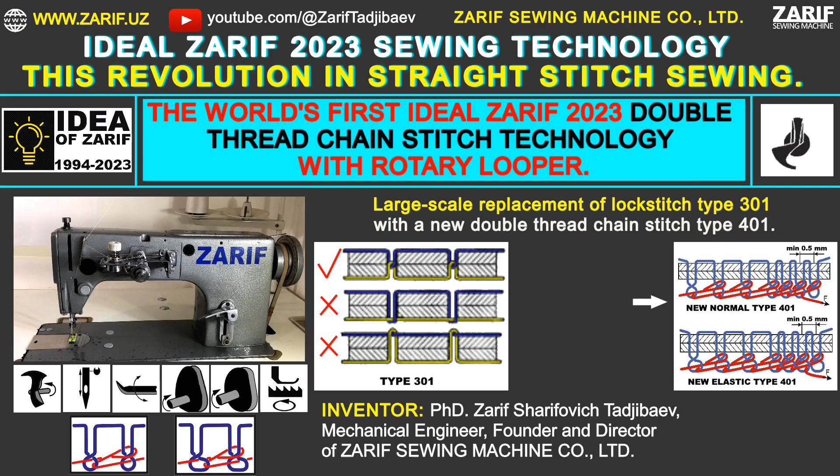Fundraising campaign to bring to market the Ideal Zarif 2023 year sewing technology, a revolution in straight stitch sewing. In 1994, we revolutionized sewing technology with the creation of the Zarif double thread chain stitch technology using a rotary looper. This breakthrough was officially recognized in 2000 with US patent number 6095069.

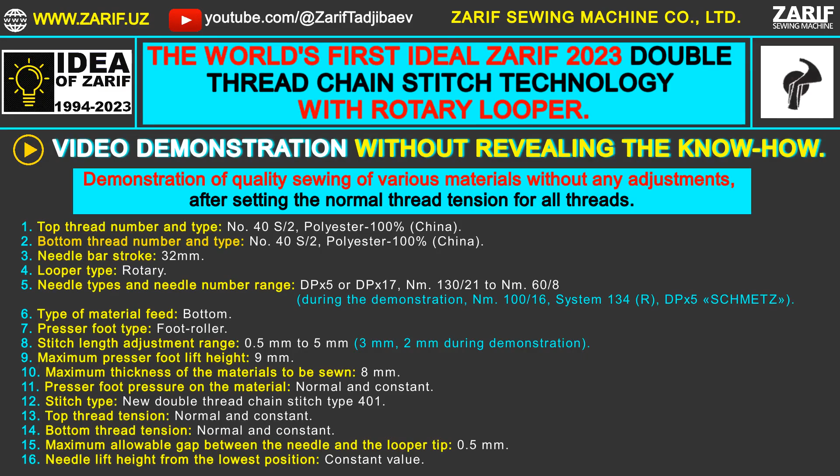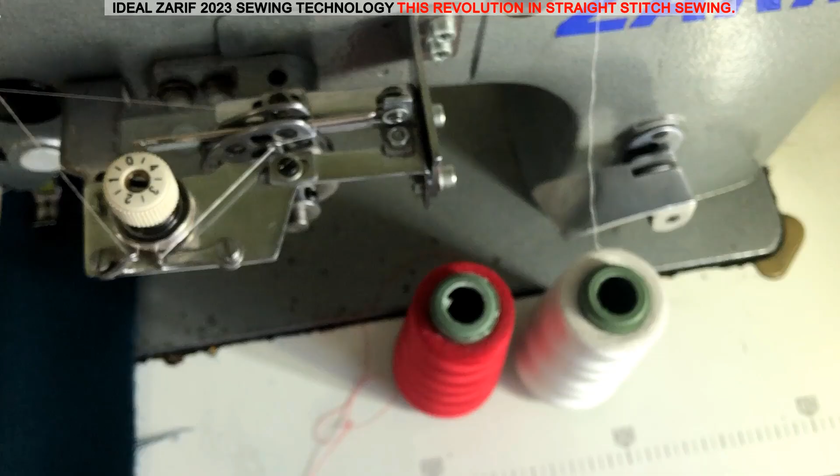Our prototype of the innovative Zarif double thread chain stitch sewing machine works on the basis of our Ideal Zarif 2023 year double thread chain stitch technology with a rotary looper. For the sewing demonstration, we will be using sewing threads made in China. The main requirement is the absence of knots, as knots disrupt the stitch formation process as they cannot pass through the eye of the needle.

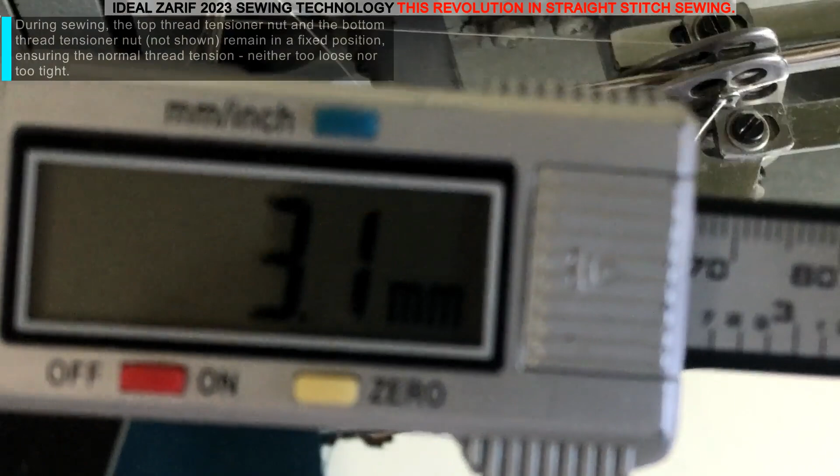During sewing, the top thread tensioner nut and the bottom thread tensioner nut, not shown, remain in a fixed position, ensuring the normal thread tension, neither too loose nor too tight.

In our Ideal Zarif 2023 double-thread chain stitch technology, the needle is not involved in pre-tightening the top thread loop from the previous stitch. As a result, for the first time ever, a double-thread chain stitch sewing machine uses a needle with one long groove.

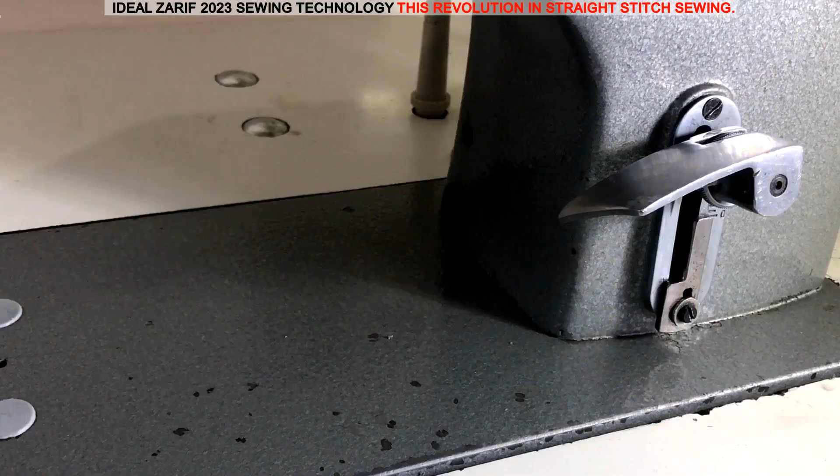This design offers greater resistance to bending compared to the double groove needle used in existing double-thread and multi-thread chain stitch technologies. Thanks to our Ideal Zarif 2023 sewing technology, it has become possible for the first time in the world to reduce the length of the double-thread chain stitch to 0.5 mm. This allows for a more secure tacking of the chain stitch seam end and prevents unraveling due to condensed stitches at a stitch length of 0.5 mm.

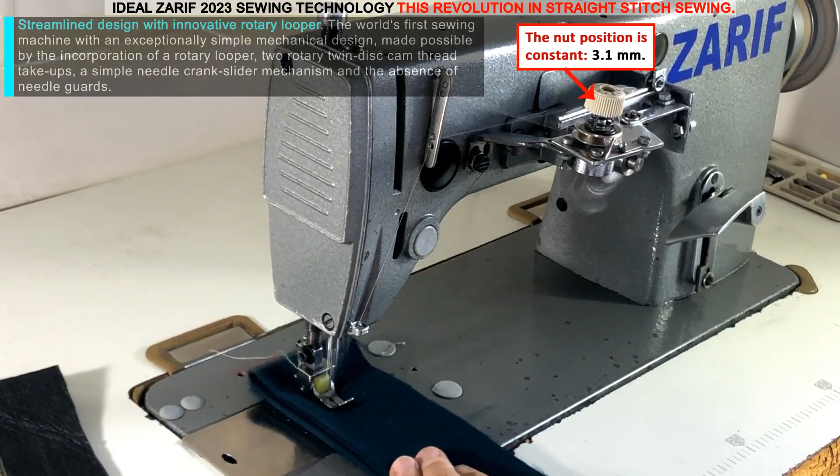Streamlined design with innovative rotary looper. The world's first sewing machine with an exceptionally simple mechanical design, made possible by the incorporation of a rotary looper, two rotary twin-disc cam thread take-ups, a simple needle crank slider mechanism, and the absence of needle guards.

Revolutionary chain stitch look. This pioneering double-thread chain stitch sewing machine produces a new double-thread chain stitch type 401, in which the loops of the top and bottom threads are rotated 180 degrees. This innovative design makes the underside of the chain stitch look like a thick thread running along the seam, rather than a chain of threads, due to the use of a rotary looper.

One long groove needle for maximum strength. For the first time, a double-thread chain stitch sewing machine uses a needle with one long groove to produce a double-thread chain stitch type 401, which offers greater flexural strength than a needle with two long grooves used in existing double-thread and multi-thread chain stitch technologies.

Easily sew combinations of different materials. The world's first double-thread chain stitch sewing machine that can sew combinations of different materials such as textile-leather, textile-plastic, and textile-plastic zippers without changing the normal tension of the threads, thanks to our know-how.

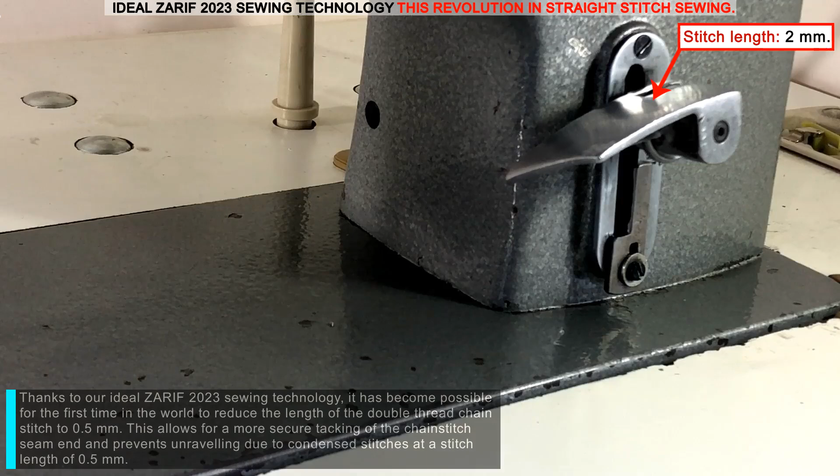The end of the chain stitch seam is securely tacked. Thanks to our Ideal Zarif 2023 sewing technology, it has become possible for the first time in the world to reduce the length of the double-thread chain stitch to 0.5 mm. This allows for a more secure tacking of the chain stitch seam end and prevents unraveling due to condensed stitches at a stitch length of 0.5 mm.

Advanced capabilities for sewing thick materials. This groundbreaking sewing machine can sew materials up to 8 mm thick with a short needle bar stroke of 32 mm, thanks to our know-how.

Breakthrough in needle stability for different materials. This revolutionary sewing machine can sew different materials without needle breakage and needle point deformation, achieved by the use of a rotary looper and a needle plate with a slot for the needle, coupled with the absence of needle guards.

Elimination of skipped stitches and unraveling. This pioneering sewing machine, thanks to our innovative design, can sew materials without a single skipped stitch, which is critical for chain stitch seams, as all types of chain stitch seams are prone to unraveling, both at the end of the seam if not securely tacked, and from the skipped stitch back to the beginning of the seam.

No thread breaks. The first sewing machine capable of sewing through materials without thread breaks when low-strength threads and threads with knots are not used, thanks to the smooth tightening of the top and bottom threads with two rotary twin-disc cam thread take-ups and our know-how.

High-quality chain stitch seams with no adjustments. For the first time in the world, we've used our know-how to achieve high-quality chain stitch seams without skipped stitches. All stitches are ideally tightened, regardless of the thickness, stiffness, or density of the material, simply by setting the normal thread tension for all threads, no further adjustments required.

A new look for the chain stitch underside. For the first time ever, the underside of a chain stitch seam looks like a thick thread running along the seam instead of a chain. This breakthrough is made possible by our new double-thread chain stitch type 401, where the top thread and bottom thread loops are rotated 180 degrees.

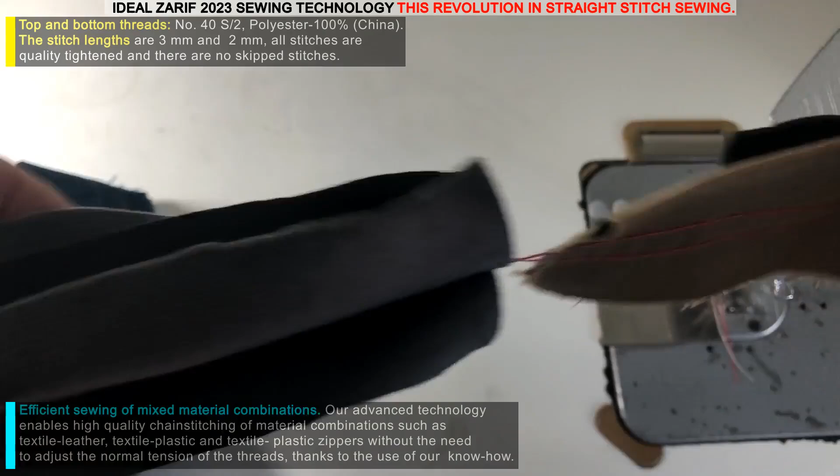For the first time, materials can be joined tightly with chain stitch. The world's first double-thread chain stitch sewing machine, thanks to the application of our know-how, is able to lock the top thread loop tightly in the stitch without changing the normal thread tension, resulting in a normal stitch that ensures a tight joining of materials for the first time in the world.

Increased wear resistance of the chain stitch seam. Thanks to our know-how, the ability to lock the top thread loop tightly in the stitch not only makes it possible for the first time to join materials tightly with a double thread chain stitch, but also presses the stitch threads tightly against the surfaces of the materials being sewn, thus increasing the wear resistance of the chain stitch seam.

Tightly joined materials made easy. Thanks to our know-how, it's now possible to join different materials tightly with chain stitch seams without having to adjust the normal thread tension. This is a revolution in sewing.

More wear-resistant chain stitches. Our advanced technology presses the top and bottom of the chain stitch against the surface of the material, greatly increasing the wear resistance of the chain stitch. This is achieved by strongly tightening the loop of the top thread in each stitch, thanks to the use of our know-how, another advance in sewing technology.

For the first time, materials can be joined tightly with chain stitch. The world's first double-thread chain stitch sewing machine, thanks to the application of our know-how, is able to lock the top thread loop tightly in the stitch without changing the normal thread tension, resulting in a normal stitch that ensures a tight joining of materials for the first time in the world.

Increased wear resistance of the chain stitch seam. Thanks to our know-how, the ability to lock the top thread loop tightly in the stitch not only makes it possible for the first time to join materials tightly with a double thread chain stitch, but also presses the stitch threads tightly against the surfaces of the materials being sewn, thus increasing the wear resistance of the chain stitch seam.

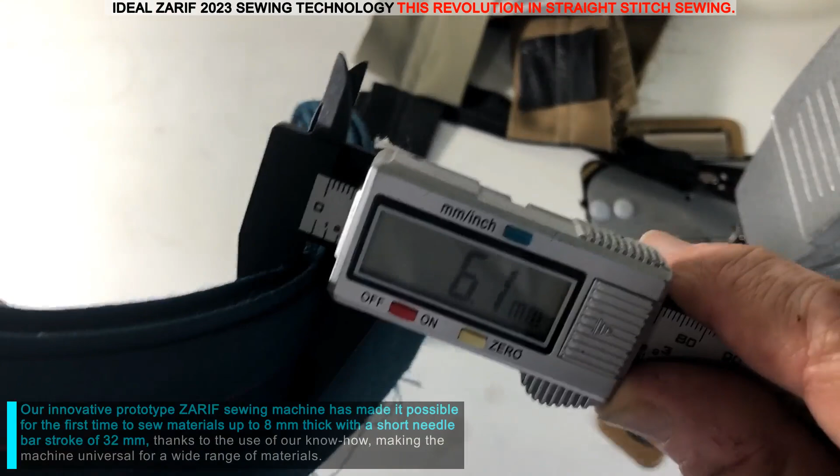Our innovative prototype Zarif sewing machine has made it possible for the first time to sew materials up to 8 mm thick with a short needle bar stroke of 32 mm, thanks to the use of our know-how, making the machine universal for a wide range of materials. The thickness of various cross-linked materials consisting of 2 or more layers in a compressed state.

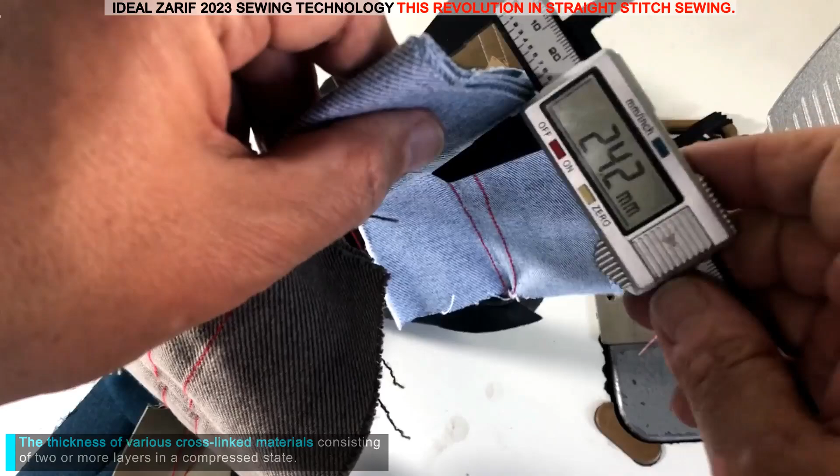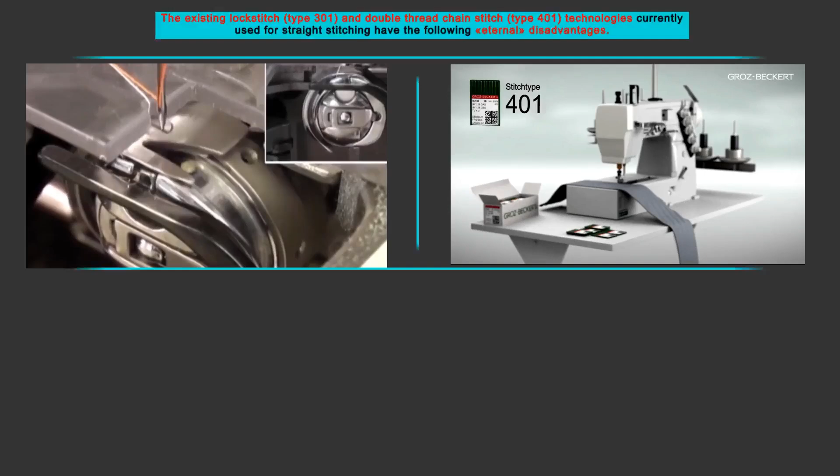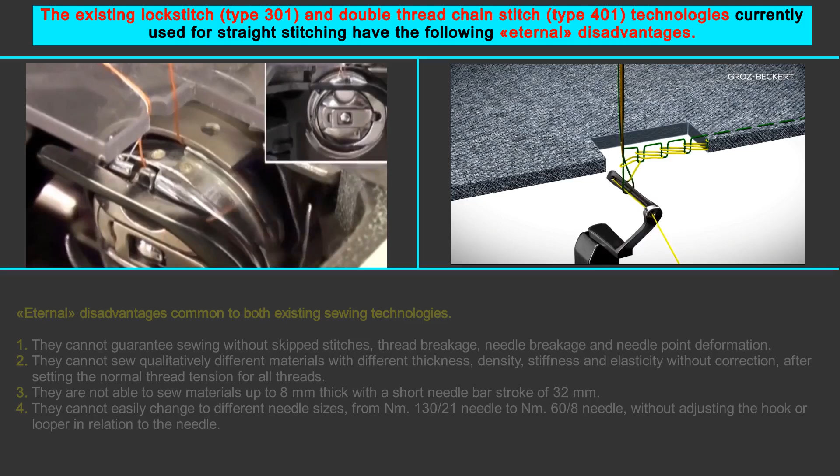The existing lockstitch (Type 301) and double-thread chain stitch (Type 401) technologies currently used for straight stitching have the following eternal disadvantages common to both existing sewing technologies.

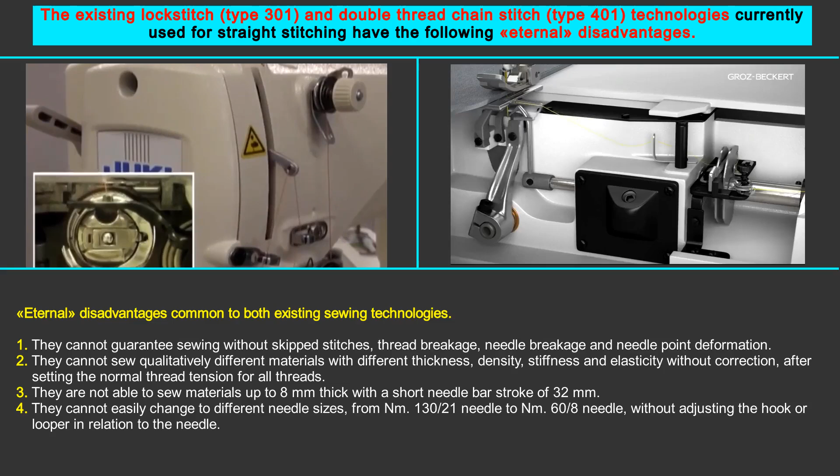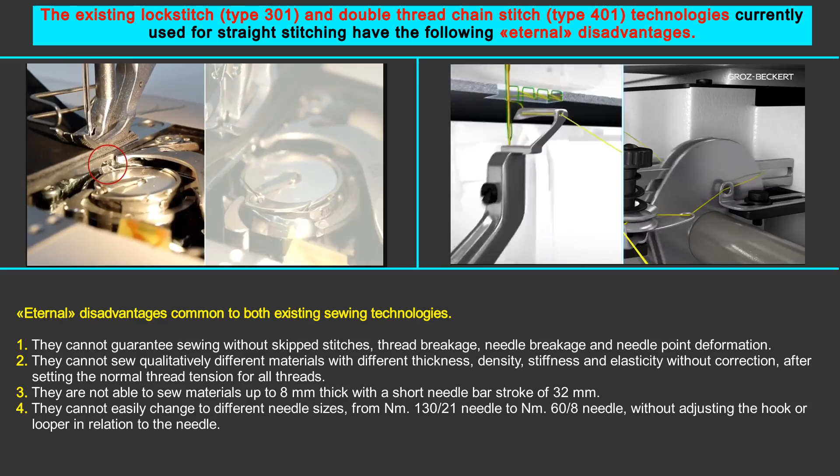They cannot guarantee sewing without skipped stitches, thread breakage, and needle point deformation. They cannot sew qualitatively different materials with different thickness, density, stiffness, and elasticity without correction, after setting the normal thread tension for all threads. They are not able to sew materials up to 8 mm thick with a short needle bar stroke of 32 mm. They cannot easily change to different needle sizes, from Nm. 130 needle to Nm. 60 needle, without adjusting the hook or looper in relation to the needle.

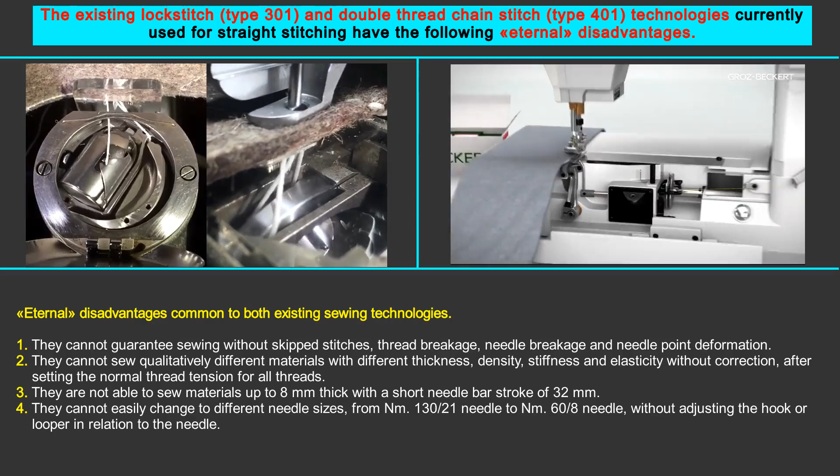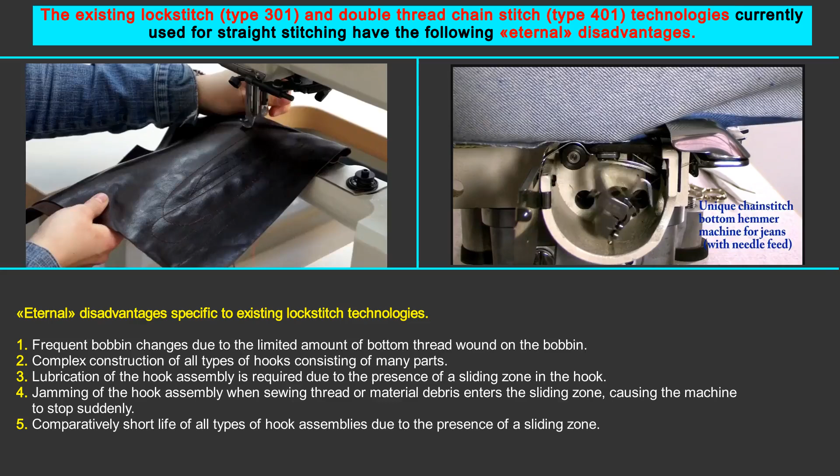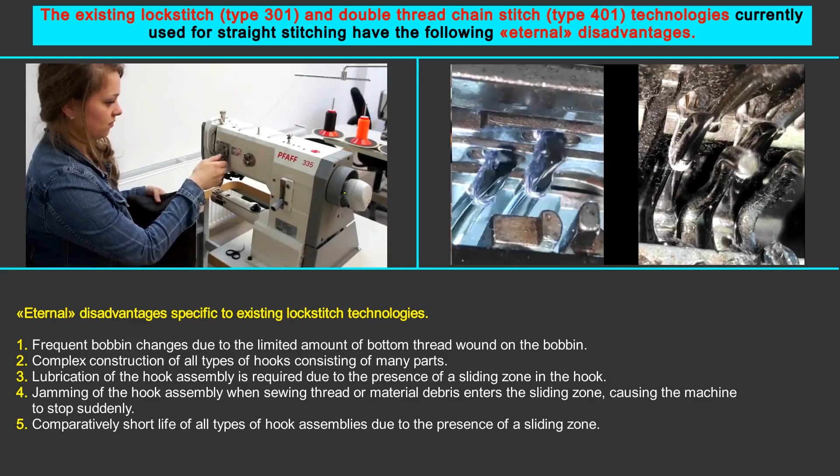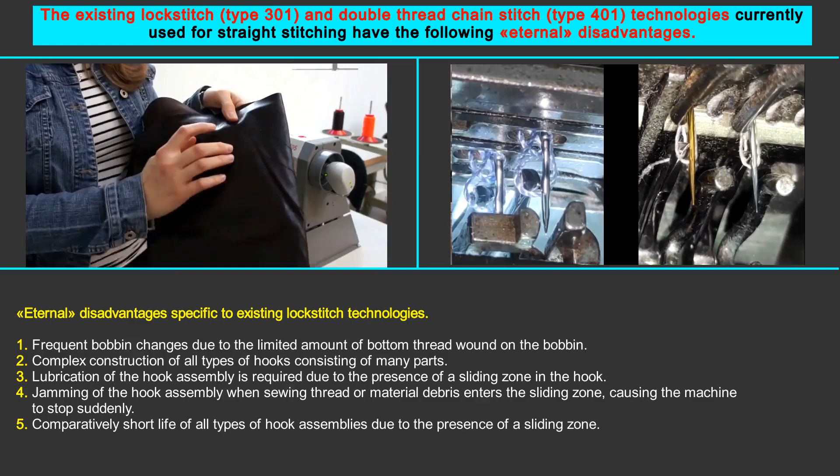Eternal disadvantages specific to existing lockstitch technologies: frequent bobbin changes due to the limited amount of bottom thread wound on the bobbin; complex construction of all types of hooks consisting of many parts; lubrication of the hook assembly is required due to the presence of a sliding zone in the hook; jamming of the hook assembly when sewing thread or material debris enters the sliding zone, causing the machine to stop suddenly; and comparatively short life of all types of hook assemblies due to the presence of a sliding zone.

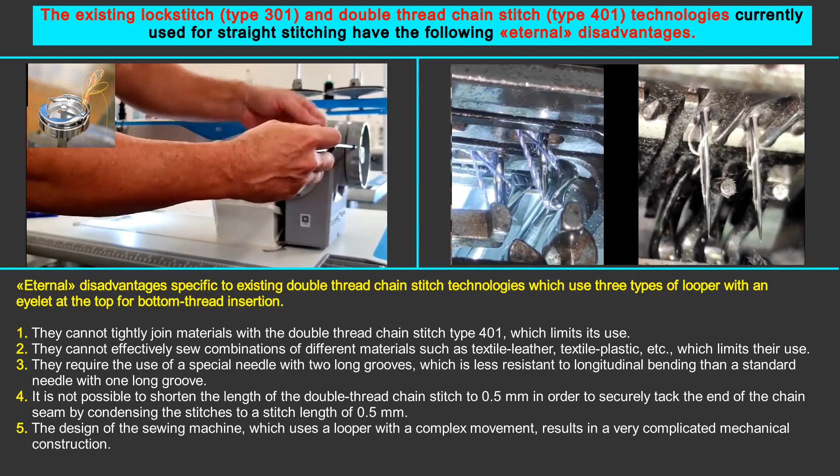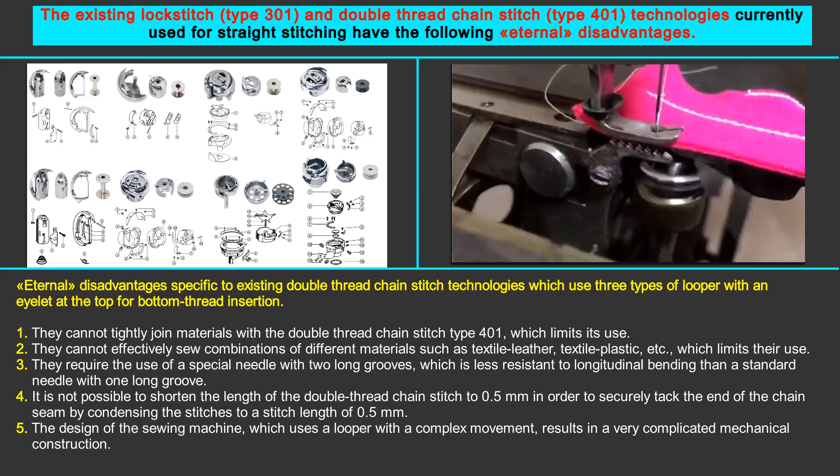Eternal disadvantages specific to existing double-thread chain stitch technologies, which use 3 types of looper with an eyelet at the top for bottom thread insertion: they cannot tightly join materials with the double-thread chain stitch type 401, which limits its use. They cannot effectively sew combinations of different materials such as textile-leather, textile-plastic, etc., which limits their use. They require the use of a special needle with 2 long grooves, which is less resistant to longitudinal bending than a standard needle with 1 long groove.

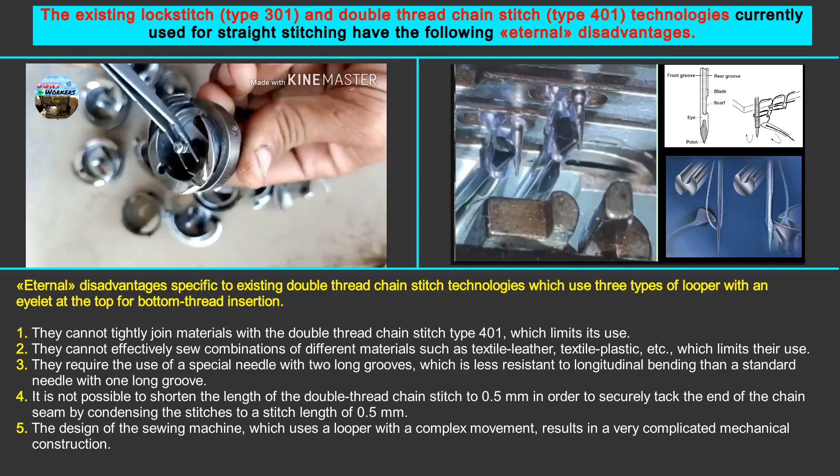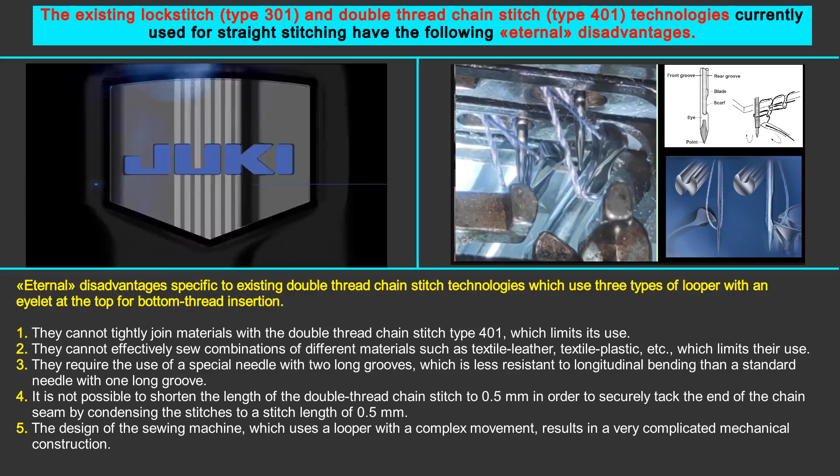It is not possible to shorten the length of the double thread chain stitch to 0.5 mm in order to securely tack the end of the chain seam by condensing the stitches to a stitch length of 0.5 mm. The design of the sewing machine, which uses a looper with a complex movement, results in a very complicated mechanical construction.

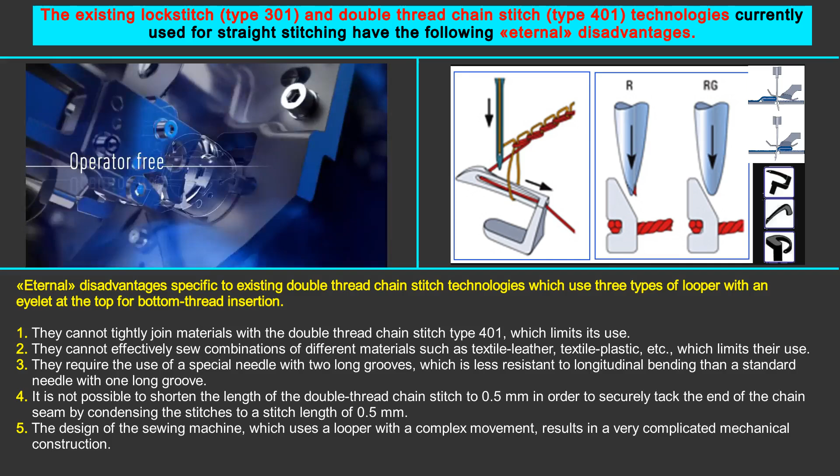Our ideal Zarif 2023 double thread chain stitch technology has revolutionized sewing machine design and straight stitch sewing. For the first time, a rotary looper is used to form a double thread chain stitch, resulting in the world's first new double thread chain stitch type 401, where the top and bottom thread loops are rotated 180 degrees.

For the first time, an ordinary needle with a single long groove is used to form a double thread chain stitch, as the needle does not participate in the pre-tightening of the top thread loop placed in the previous stitch. For the first time, materials up to 8 mm thick can be sewn with a needle bar stroke of 32 mm. For the first time, it is possible to sew materials of different thickness, density, stiffness, and elasticity without any adjustments, by setting the normal tension for all threads.

For the first time, it is possible to sew without skipped stitches, thread breakage, needle breakage, and needle point deformation, provided the thread is free of knots and the needle size matches the material being sewn. For the first time, using our know-how, it is possible to tightly pull the top thread loop in a stitch to achieve a dense material join, or to loosely pull the top thread loop in a stitch to get smooth seams on light materials and elastic seams in stretchable materials, without adjusting normal thread tension.

For the first time, the maximum allowable gap between the needle and the tip of the looper has been increased to 0.5 mm, allowing an easy transition from a number 130 needle to a number 60 needle without adjusting the looper relative to the needle. For the first time, high stitch formation reliability has been achieved without the use of needle guards.

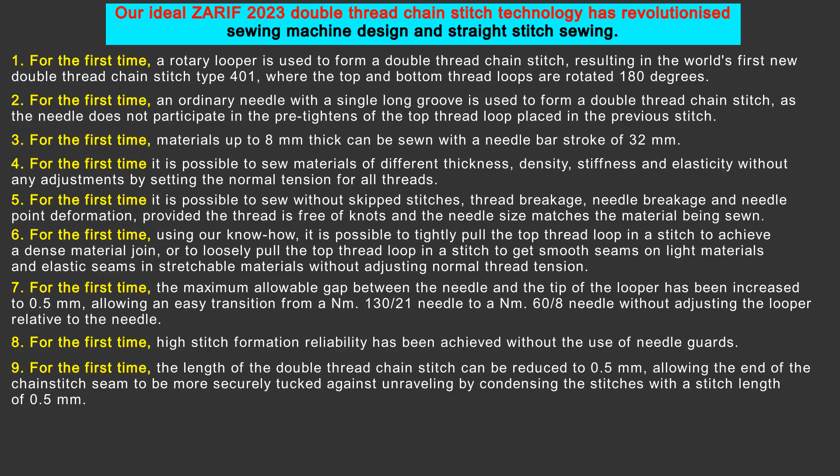For the first time, the length of the double thread chain stitch can be reduced to 0.5 mm, allowing the end of the chain stitch seam to be more securely tucked against unraveling by condensing the stitches with a stitch length of 0.5 mm. For the first time, it is possible to develop different types of sewing machines, with different types of platforms and different types of material feed, with a very simple mechanical design that operates with high reliability and long service life.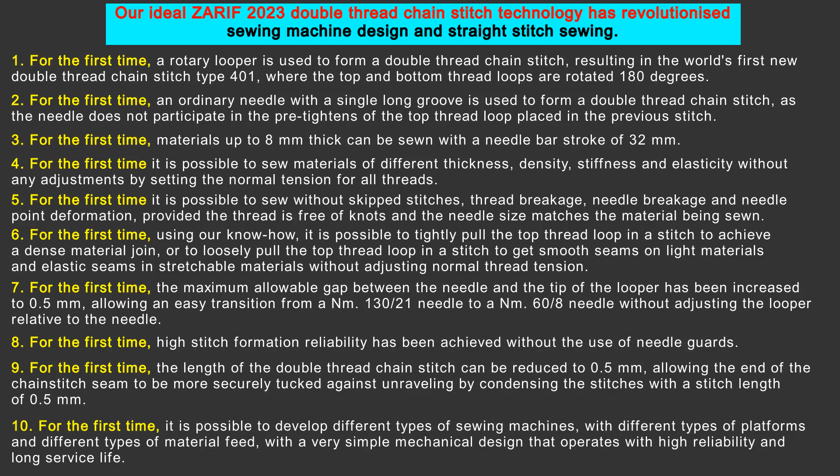History of Zarif double thread chain stitch technology with rotary looper: In 1994, we came up with the idea of creating a double thread chain stitch type 401 using a rotary looper. We applied for a patent for this new Zarif double thread chain stitch technology, and in 2000, US patent number 6095069 was granted.

Before our invention, the rotary looper was used in the single thread chain stitch technology, type 101, on single thread chain stitch sewing machines and button machines.

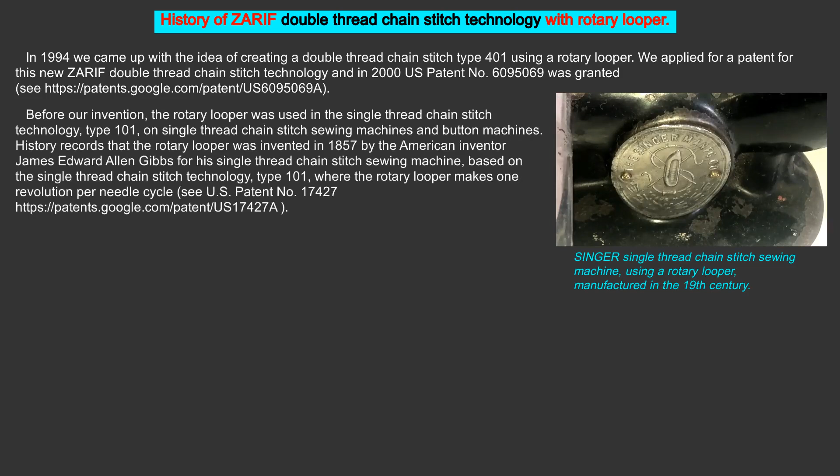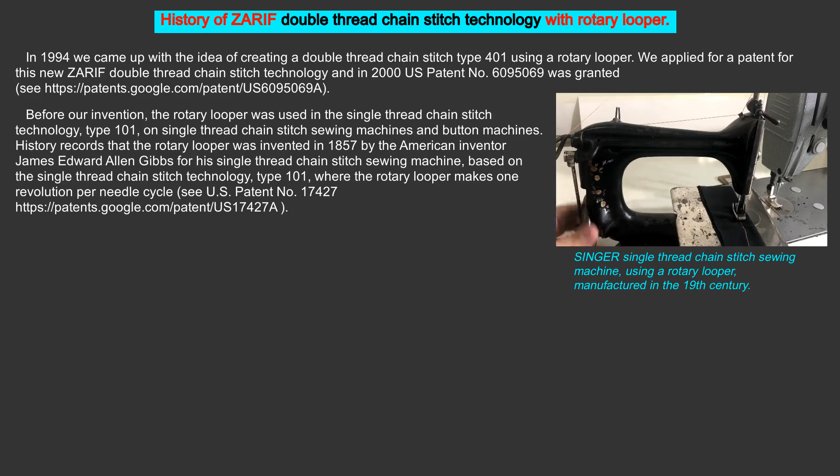History records that the rotary looper was invented in 1857 by the American inventor James Edward Allen Gibbs for his single thread chain stitch sewing machine, based on the single thread chain stitch technology, type 101, where the rotary looper makes 1 revolution per needle cycle. See US patent number 17427.

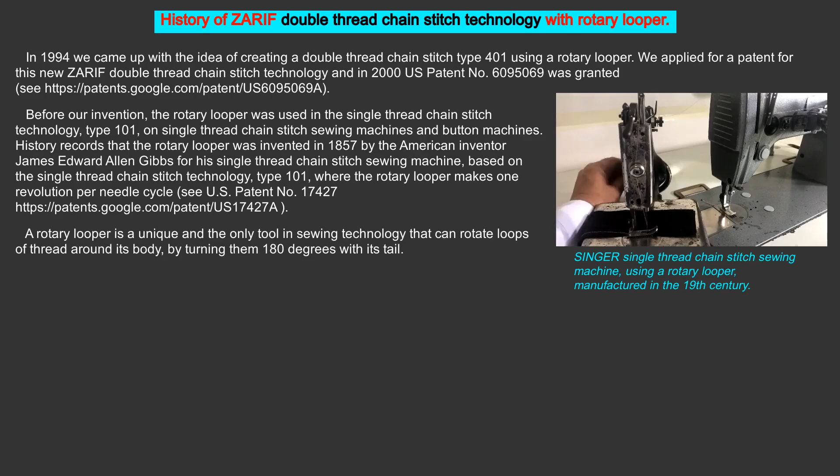A rotary looper is a unique and the only tool in sewing technology that can rotate loops of thread around its body by turning them 180 degrees with its tail.

As is known, the rotary looper is made in one piece and has 3 zones: the head zone with a front tip to catch the thread and a rear tip to release the thread loop from the body of the looper, the tail zone for rotating the thread loop through 180 degrees, and the shaft zone for attaching the looper to the machine.

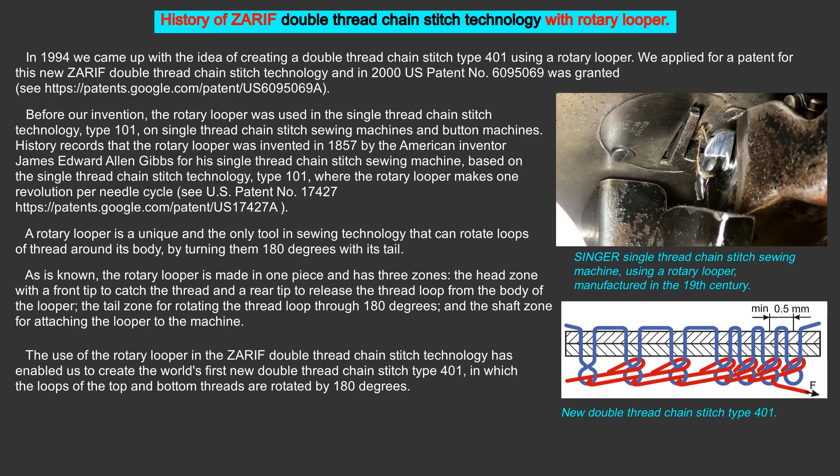The use of the rotary looper in the Zarif double thread chain stitch technology has enabled us to create the world's first new double thread chain stitch type 401, in which the loops of the top and bottom threads are rotated by 180 degrees. The Zarif double thread chain stitch technology forms a double thread chain stitch type 401, where the rotary looper makes 2 revolutions per needle cycle.

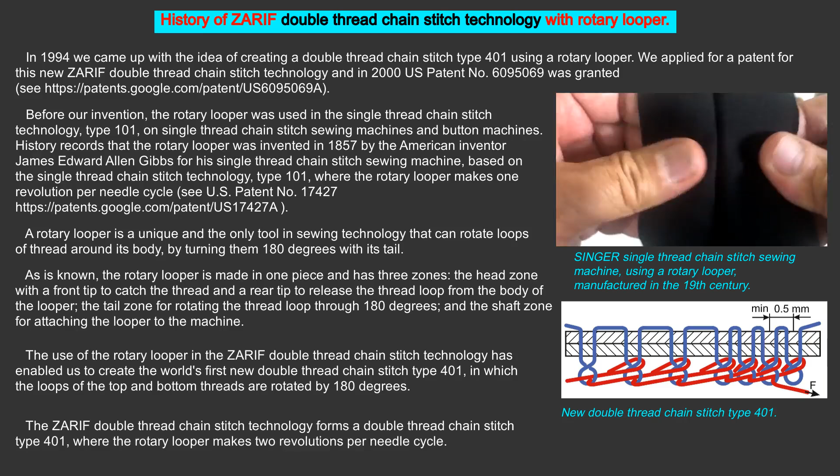The rotary looper makes 2 revolutions per needle cycle. Zarif double thread chain stitch technology with rotary looper, invented by us in 1994, see US patent number 6095069.

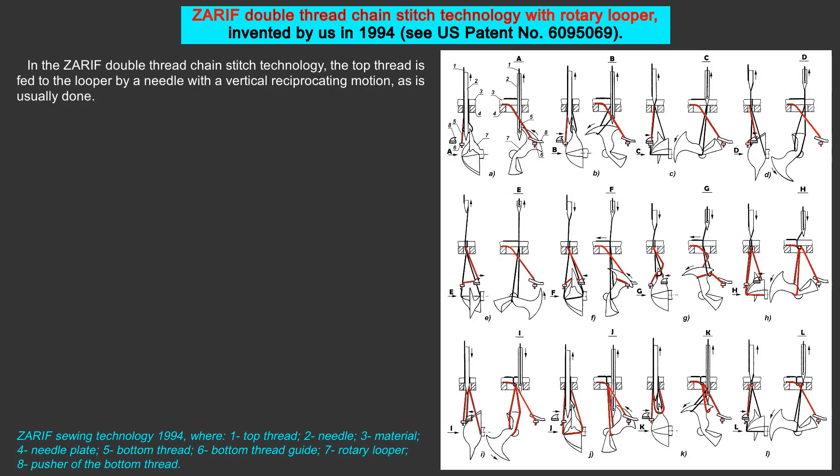In the Zarif double thread chain stitch technology, the top thread is fed to the looper by a needle with a vertical reciprocating motion, as is usually done. To feed the bottom thread to the looper, a bottom thread pusher is used, which makes oscillating movements in the horizontal plane.

Since the rotary looper can loop thread around its body in the form of a loop, once the bottom thread, fed by the bottom thread pusher, is caught by the front tip of the looper, the top thread loop leaves the looper body and, as it tightens, forms a loop from the bottom thread which the looper can now wrap around its body. As the rotary looper only uses a small length of the thread loops...

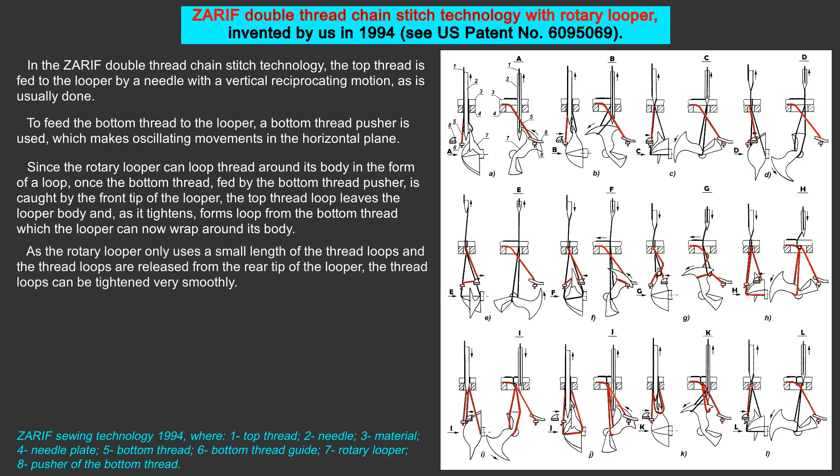The thread loops are released from the rear tip of the looper, so the thread loops can be tightened very smoothly. Therefore, the Zarif double thread chain stitch technology uses 2 rotary twin disc cam thread take-ups to feed and tighten both the top and bottom threads, with each thread being controlled separately.

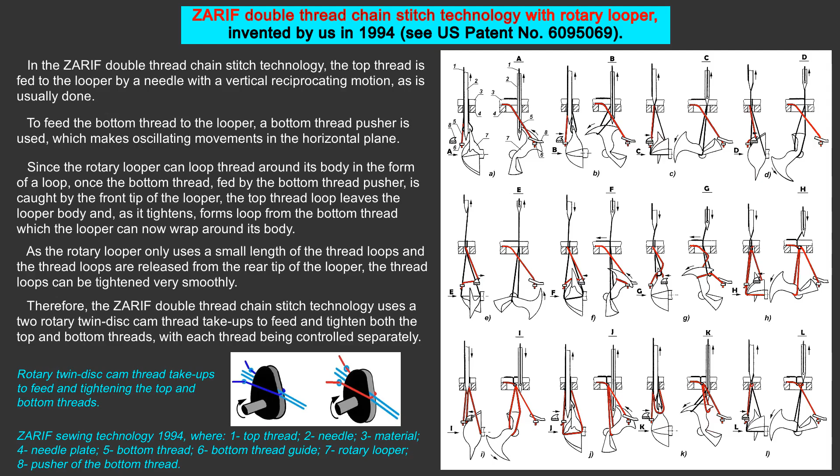History of the prototype development of the Zarif sewing machine based on Zarif double thread chain stitch technology with a rotary looper. In 1997, we decided to build a prototype sewing machine to test our new Zarif double thread chain stitch technology with a rotary looper, which we had invented in 1994.

We chose a Class 1022 lockstitch industrial sewing machine from the Belarusian company Orsha because it was widely used in Uzbekistan at the time and was relatively affordable. The machine had a needle bar stroke of 32 mm and was designed to sew fabrics of medium thickness.

After a thorough review of the machine's design, we successfully integrated our new Zarif sewing technology into the machine, retaining only the mechanisms of the material feed, presser foot, and needle. Thus, in 1997, we produced the world's first prototype of the Zarif double thread chain stitch sewing machine with rotary looper.

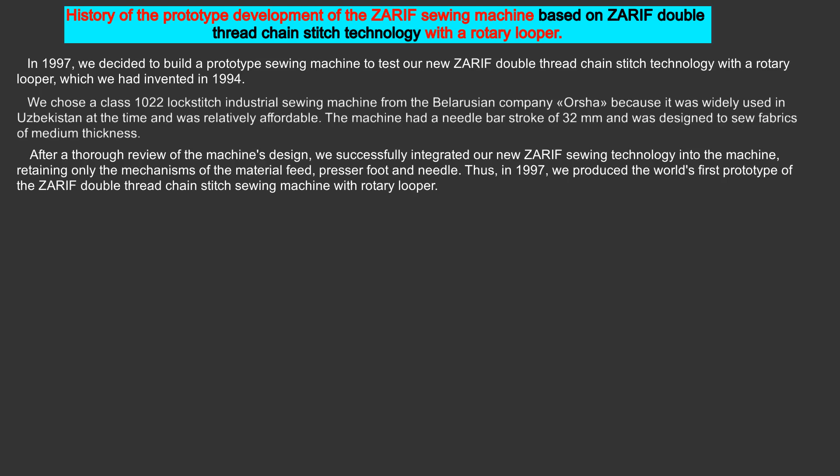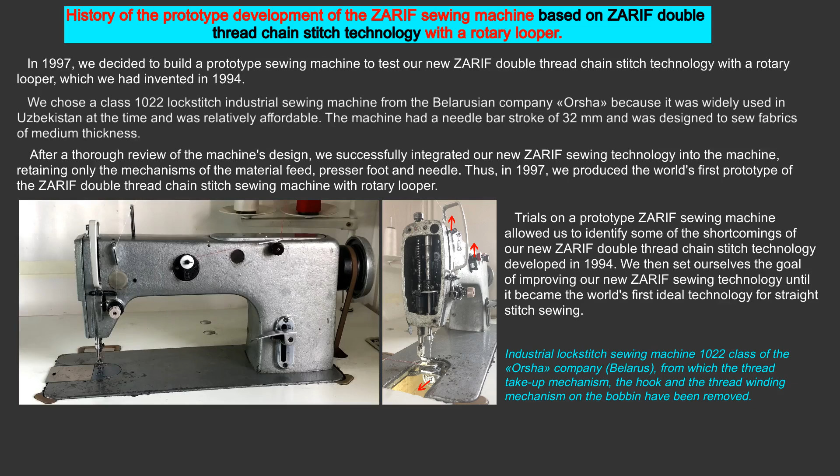Trials on a prototype Zarif sewing machine allowed us to identify some of the shortcomings of our new Zarif double thread chain stitch technology developed in 1994. We then set ourselves the goal of improving our new Zarif sewing technology until it became the world's first ideal technology for straight stitch sewing.

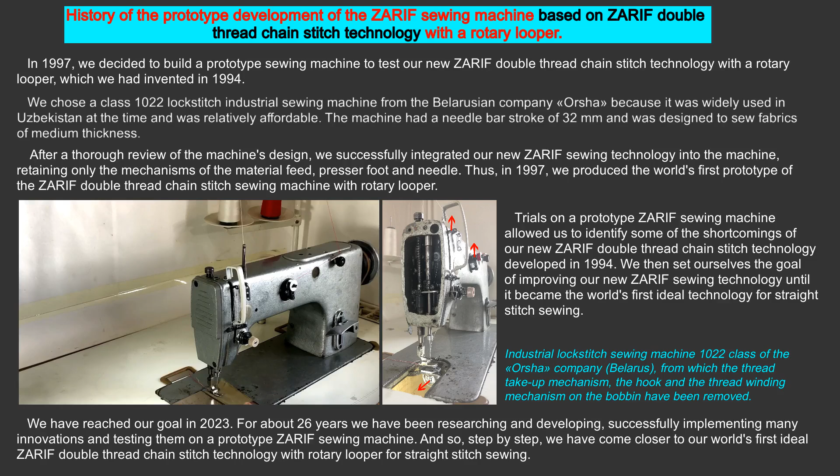We have reached our goal in 2023. For about 26 years we have been researching and developing, successfully implementing many innovations and testing them on a prototype Zarif sewing machine. And so, step by step, we have come closer to our world's first ideal Zarif double thread chain stitch technology with rotary looper for straight stitch sewing.

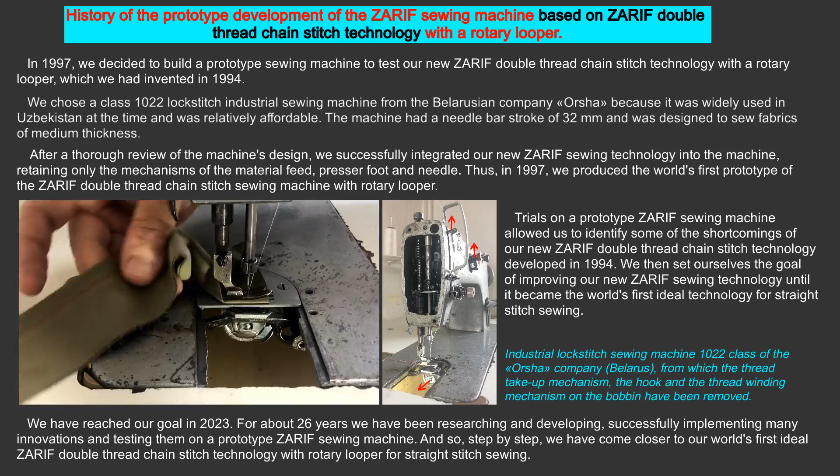Stitch type, working units, and technical specifications of the prototype Zarif sewing machine based on the ideal Zarif 2023 year double thread chain stitch technology with rotary looper.

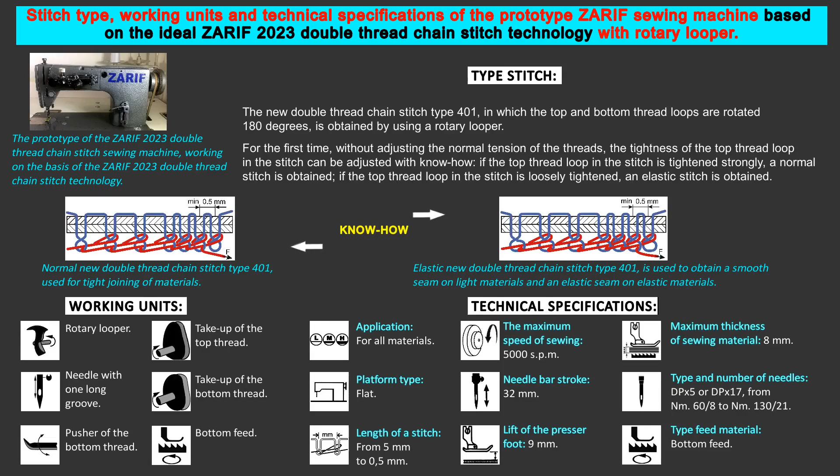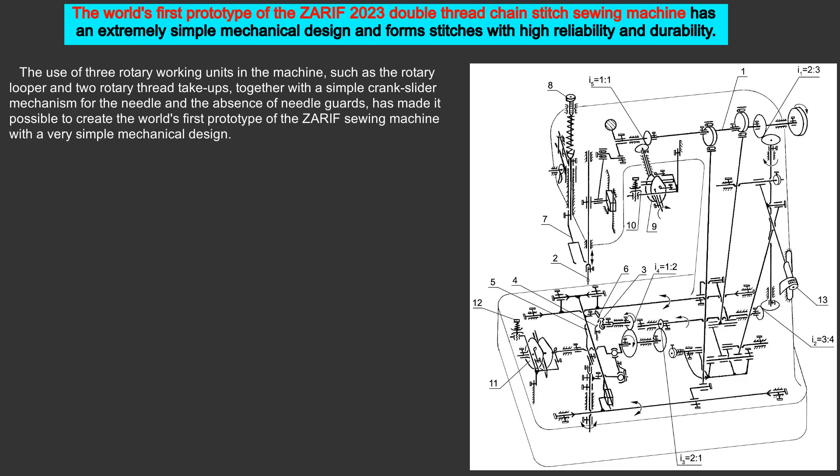The world's first prototype of the Zarif 2023 double thread chain stitch sewing machine has an extremely simple mechanical design and forms stitches with high reliability and durability. The use of 3 rotary working units in the machine, such as the rotary looper and 2 rotary thread take-ups, together with a simple crank slider mechanism for the needle and the absence of needle guards, has made it possible to create the world's first prototype of the Zarif sewing machine with a very simple mechanical design.

In addition, the machine is the first in the world to allow easy switching between different needle sizes, from needle number 130 to needle number 60, without having to adjust the position of the looper relative to the needle, thanks to the world's first increase of the maximum allowable gap between the needle and the looper tip to 0.5 mm.

In addition, the machine is very easy to maintain as all working units are mounted on the ends of the shafts and can be removed without dismantling other parts of the machine.

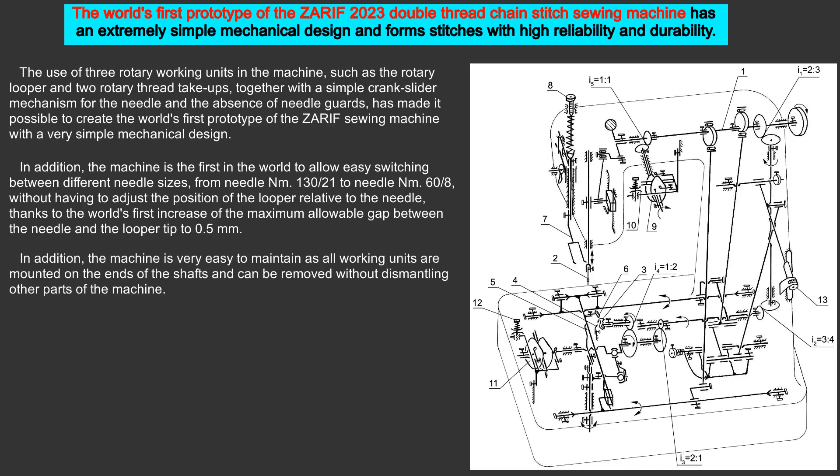Kinematic diagram of the prototype Zarif 2023 double thread chain stitch sewing machine.

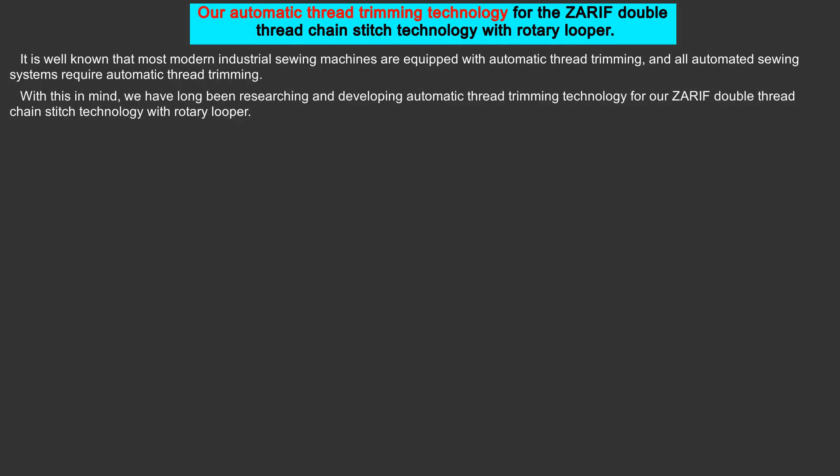Our automatic thread trimming technology for the Zarif double thread chain stitch technology with rotary looper. It is well known that most modern industrial sewing machines are equipped with automatic thread trimming, and all automated sewing systems require automatic thread trimming. With this in mind, we have long been researching and developing automatic thread trimming technology for our Zarif double thread chain stitch technology with rotary looper.

Thanks to these efforts, we successfully invented the automatic thread trimming technology for our Zarif double thread chain stitch technology with rotary looper in 2020, and further improved it in 2021 and 2023. The advanced version of our automatic thread trimming technology, which we invented in 2023, has not yet been physically manufactured to ensure its practical functionality. However, the drawings of our automatic thread trimming technology prove that it works in theory. At present we cannot disclose the details of our automatic thread trimming technology as it is not yet patented.

However, we can say that the top and bottom threads are trimmed under the needle plate, with the bottom thread end remaining clamped under the needle plate after trimming. This eliminates the need to rethread the bottom thread when moving to the next sewing operation.

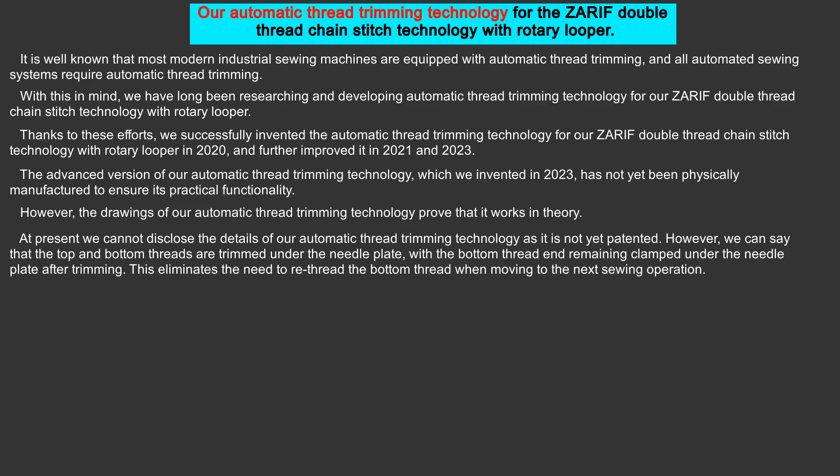If the sewing process is finished with condensed stitches of 0.5 mm stitch length and manual thread trimming, the resulting chain stitch seam will be difficult to unravel from the end of the seam. If the sewing process is finished with condensation stitches at a stitch length of 0.5 mm and with automatic thread trimming, the resulting chain stitch seam cannot be unraveled from the end of the seam, as the end of the top thread passes through the last loop of the bottom thread.

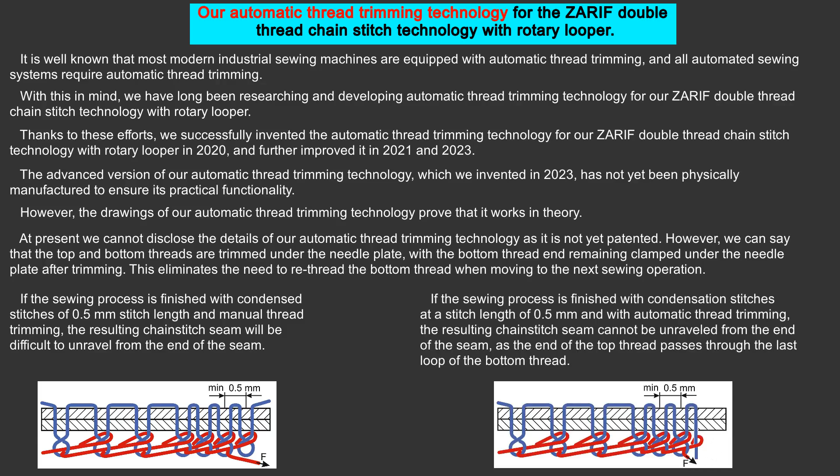Our ideal Zarif 2023 double thread chain stitch technology with rotary looper opens a new era in the development of automated straight stitch sewing. It is well known that the future of mass production in various sewing industries is closely linked to automation, and the automation of sewing processes plays an important role in this transformation.

Currently, some sewing operations are already being automated using robotic manipulator-controlled sewing systems. In the future, these robotic manipulators may be replaced by more advanced humanoid robots.

When it comes to automated sewing, it is essential that the process is performed to a high standard, ensuring that there are no skipped stitches, thread breakage, needle breakage, and deformation of the needle point. Efficient sewing of different materials without the need for adjustments is also critical to the automation of the sewing process.

Our ideal Zarif 2023 double thread chain stitch technology with rotary looper for straight stitch sewing is the perfect solution to meet all these requirements. Our prototype Zarif sewing machine has proven this in practice, but only when the material is fed in one direction.

This allows us to create different automatic sewing systems based on this technology, where the material is fed in a single direction. However, there are many sewing operations where the stitch must follow a complex path.

In such cases, stitch formation must be independent of the material feed direction. With this in mind, we have been working for a long time to develop a device that would allow our Zarif double thread chain stitch technology with rotary looper to produce stitches regardless of the direction of material feed.

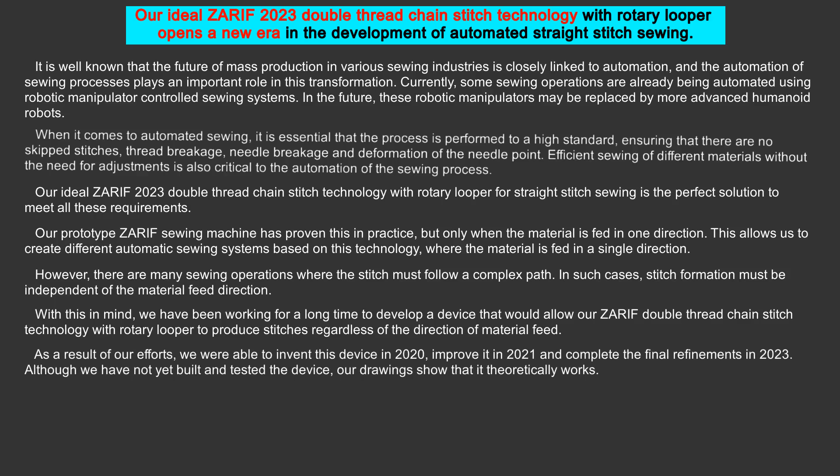As a result of our efforts, we were able to invent this device in 2020, improve it in 2021 and complete the final refinements in 2023. Although we have not yet built and tested the device, our drawings show that it theoretically works.

Patent protection for our inventions that we invented in 2023. We intend to secure patents in several countries around the world for all our inventions developed in 2023, including the ideal Zarif double thread chain stitch technology with rotary looper, automatic thread trimming technology and the device that allows stitch formation with material feed in any direction.

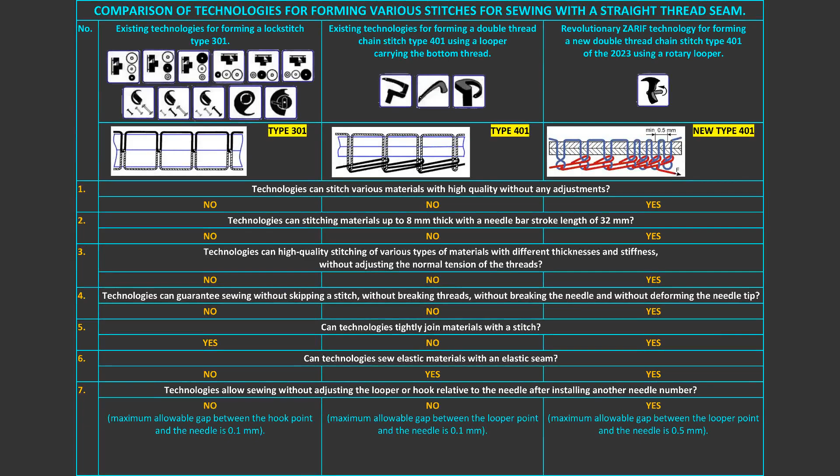Advantages and disadvantages of lockstitch type 301 and double thread chain stitch type 401. Comparison of technologies for forming various stitches for sewing with a straight seam.

Application of the revolutionary ideal Zarif 2023 year double thread chain stitch technology with a rotary looper that forms stitches in only one direction. Our prototype Zarif sewing machine, based on this technology, has proven its ability to perform straight stitching with material feed in only one direction and a stitch length ranging from 0.5 mm to 5 mm.

In addition, we have developed a technical solution that allows the stitch length to be increased to 10 mm. Based on our ideal Zarif 2023 year double thread chain stitch technology, which forms stitches in only one direction, the following machines can be designed and manufactured.

Various industrial sewing machines with different types of platforms and material feed mechanisms. Various automated sewing systems with material feed in one direction only. A range of programmable automatic pattern sewing machines with a 360 degrees rotating head that can feed material in any direction to create complex stitch patterns.

Application of the revolutionary ideal Zarif 2023 year double thread chain stitch technology with a rotary looper, forming stitches in any direction. If the device we invented in 2023, which enables our ideal Zarif 2023 year double thread chain stitch technology with a rotary looper to form stitches with material feed in any direction, works successfully in practice, the following automated machines can be designed and manufactured on the basis of it, enabling the production of complex stitch patterns.

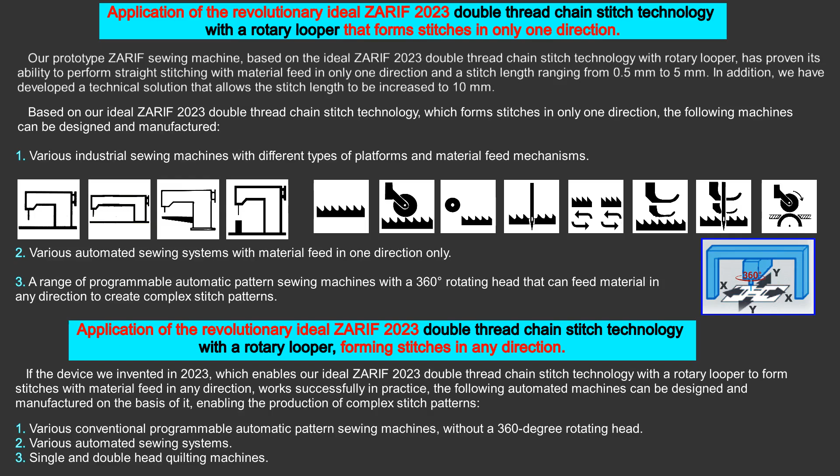Can our revolutionary ideal Zarif 2023 year double thread chain stitch technology with a rotary looper become obsolete in the future? We are confident that this will not happen. Our confidence is based on the following undeniable facts.

The eternal disadvantages of the existing sewing technologies currently used for straight stitch sewing, such as the lockstitch type 301 and the double thread chain stitch type 401, prevent them from becoming the ideal solution for straight stitch sewing, no matter how much they evolve in the future.

Furthermore, the invention of an ideal straight stitch sewing technology can only be achieved by creating a new double thread chain stitch technology that eliminates the eternal disadvantages of existing sewing technologies. Since it is technically impossible to invent an ideal straight stitch sewing technology by developing a new lockstitch technology without using a hook. However, the task of inventing a new double thread chain stitch technology and making it the ideal solution for straight stitch sewing is a very challenging one.

All previous attempts to invent a new double thread chain stitch technology and make it the ideal solution for straight stitch sewing were unsuccessful. For example, the new double thread chain stitch technology using a special hook, see US patent number 3811392, 1974, was never commercialized.

We believe that any new double thread chain stitch technology using a special hook cannot become an ideal solution for sewing due to the complexity of the special hook design and the need for lubrication.

We were the first in the world to invent the new Zarif double thread chain stitch technology with rotary looper in 1994, which was granted US patent number 6095069 in 2000. It took us about 26 years to make this new Zarif sewing technology the world's first ideal straight stitch sewing technology.